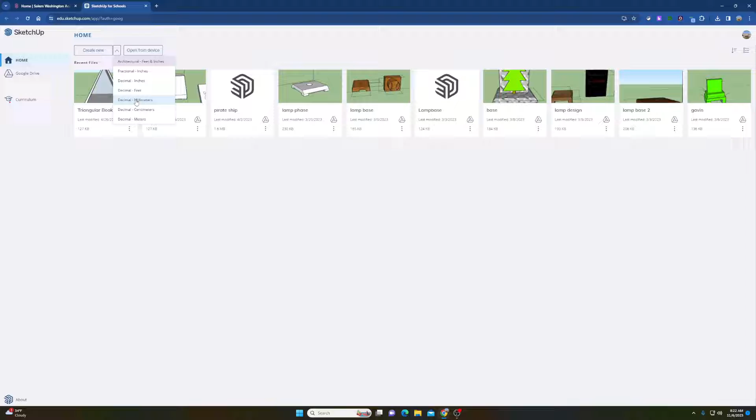You want it to be in millimeters decimal. So go to the drop down arrow next to Create New, and create a new decimal millimeters screen. Now your measurements will be in millimeters, since we are doing our 3D printed magnet. As a max, the 3D printed magnet can be 75 millimeters in diameter and about 10 millimeters in thickness, extrusion.

So we have the rectangle tool here. I don't want to show you the rectangle tool because that is in this tool menu. What is confusing a lot of people is where you find everything else. On your Chromebooks it looks like that. On the computer it looks like this, but I'm going to make it look like your Chromebook so it's the same layout. Let's say I'm going to choose a circle.

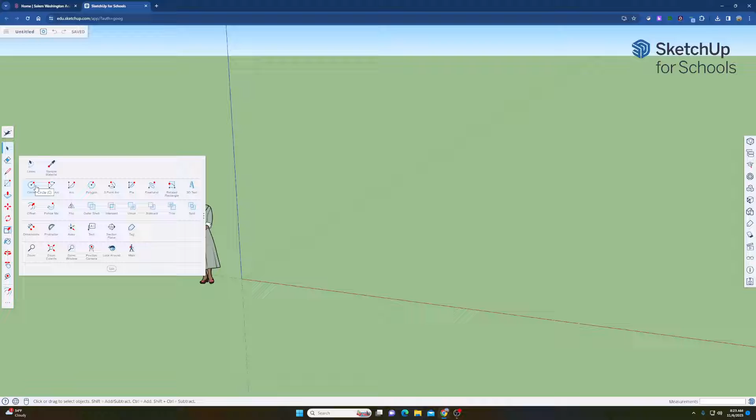Circles first tell you the sides that it's made of, 24. That's how many little lines there are in a circle. With the size that we're doing, 24 is just fine. It's also asking me for a radius. If you remember in math, radius is half the diameter of a circle. The radius is the center to the outside edge of a circle.

So if I wanted a 60 millimeter diameter, I'll do a 30 millimeter, okay? Notice I didn't click anywhere or touch anything, I just typed on the keyboard while I had the tool open. Before I click and the tool's still open, I can let go of the mouse, type in 30mm, hit enter, and it's now there.

Now it looks small compared to the person, but that's why the person is there, to give you scale and perspective. If it looks like a gigantic pool, then you know that it's too big for the 3D printer.

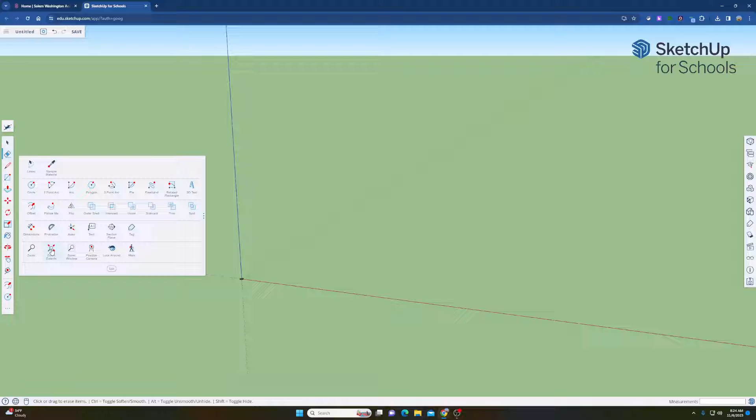So first thing I'm going to do is erase the person. Second, under the menu down here, I'm going to click on this magnifying glass with the 3 arrows, that's zoom extents, and I'm now zoomed in. Now I'm going to roll back a little bit so you can see it, using my mouse wheel to roll in and out.

I am going to use the push-pull tool. Push-pull, and now I had said about 10 millimeters, so if I make this bottom let's say 4 millimeters, I can let go of the mouse or just go with the mouse. It's clicking at each millimeter interval, so I can just bring it up to 4 millimeters. I don't have to go to the max, I can do a little less than the max.

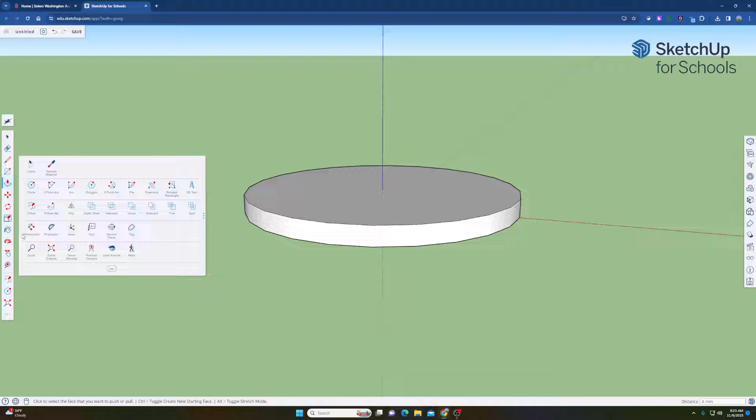Now let's say I want to add some 3D text to it. Under the dots, up under all the different shapes, you have the 3D text tool. If you notice, it starts out with a height of minus 305 millimeters and the text extrusion at minus 152 millimeters. We're going to want to change these values.

So the height is the height of the actual letters. If my circle is 60 millimeters, let's see how big it will be with a height of 30 millimeters. Then the extrusion, I only want it to come out 4 millimeters, right? So my whole thing will be 8 millimeters thick. Let's say I'm going to write Tech 7.

Depending on the font you choose, sometimes the fonts will have some different options to them. So let's say if I select it, I can choose a bold font. Oh, I have to choose it before I type it, let's just verify that. So is it bold? Tech 7. And let's say I'm going to write it in a different font.

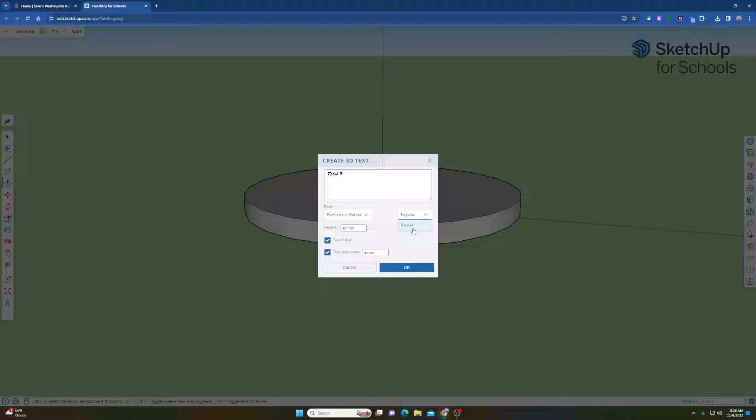Okay, so see how this one you can only do regular, can't do it in bold. So let's say Tech 7. Okay, so they're way too big.

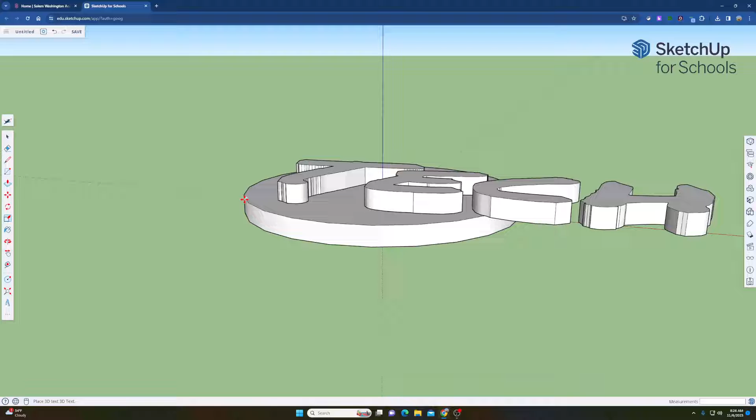One of the really important things you can also do is make sure that you're selecting the surface to put this on. You don't want to put it on the side, and you don't want to put it down where it's going to be at the same height. You want to put it on top. So I'm going to click on one of the points on the circle, and if you notice, it has this blue bar around it.

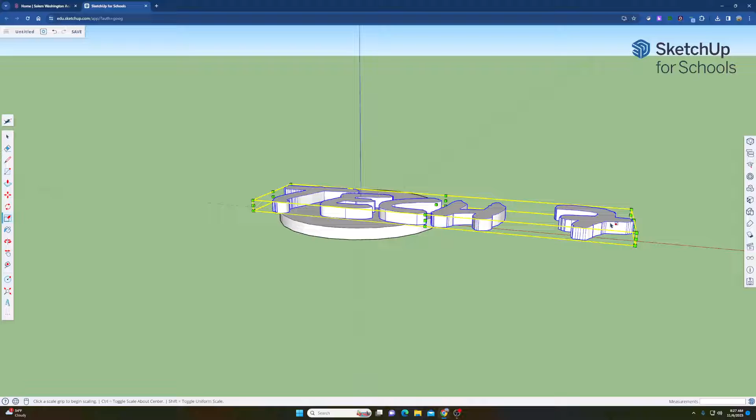The blue bar allows you to move it around on the red axis. Then the scale tool is this one with the handles - if I click on it with the scale tool, I now have the handles. I'm going to grab a handle from the top, because I really want it to get smaller. So it did get smaller, so I'll have to go up a little bit to make it that many millimeters.

Okay, now I want to move it - readjust it, not get rid of it. So I'm going to click on the 4 arrows. I like to click somewhere near the bottom so that I'm keeping it on top of the surface, on face. See that? How it said on face? That's what you want it to say, on face, meaning it's on the top of that circle.

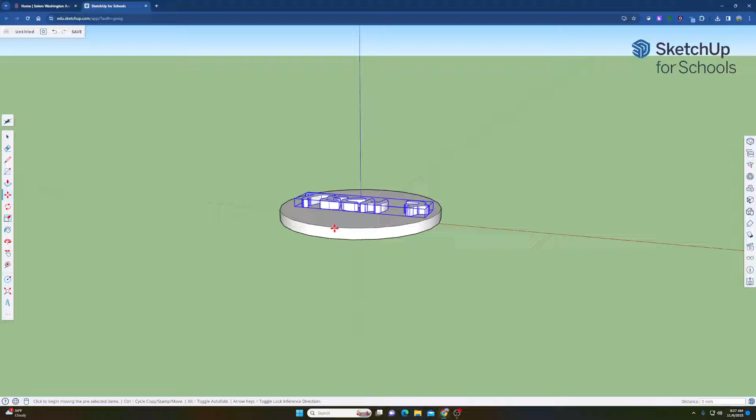Okay, let's say we want to change some colors here. Under the paint bucket tool, which is right there, it opens up a menu with some common colors, but if you click on search, you have all types of colors. I could even just go into colors. Let's say I want the lettering to be yellow, so I click on that, and the lettering is yellow.

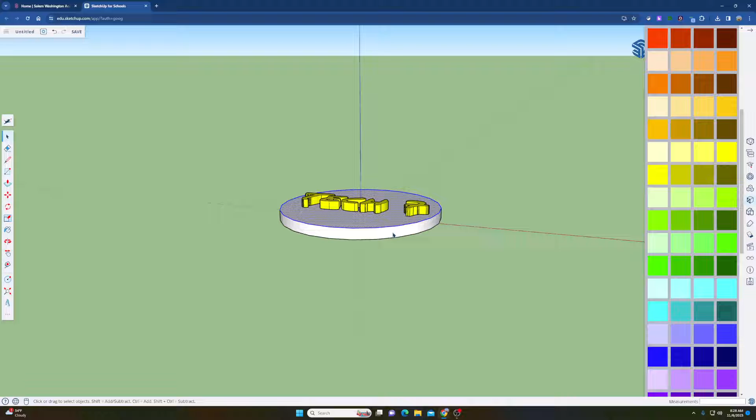Another handy tip is that if you triple click on something, you select all of it. So click, click, click - I can do all the surfaces at once.

Okay, so that's a quick little tutorial on doing a circle with 3D print. If you want to try out different shapes, try out different shapes.

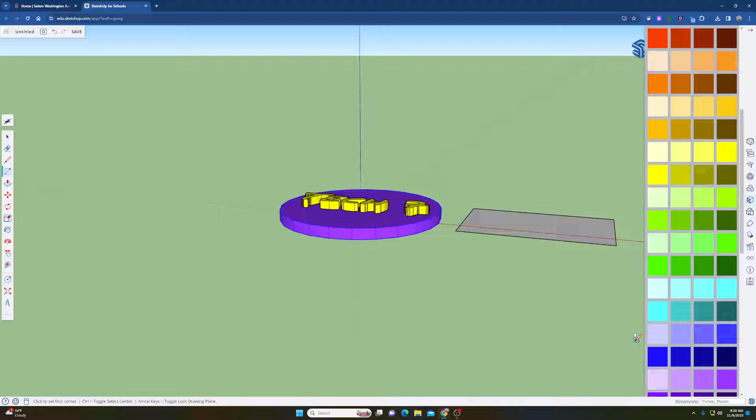Remember that you're in millimeters, so if I wanted to make something to be the biggest it can be, I just let go and type in, say, 75 millimeters, comma, space, let's say 35 millimeters. So it should be like a rectangle. Okay, and if I back out, you'll see that it is actually a rectangle.

Okay, if I wanted to lift this up first, you can go up, let's say 5 millimeters. And let's say I don't want it to be pointy in the corners, so I'm going to try a different shape, and I'm going to kind of push it away.

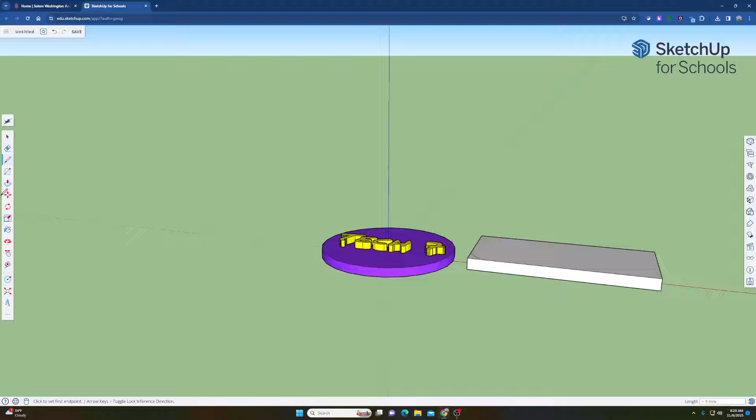First, you have the line tool to make a straight line. So if I made a straight line from, let's say, here to here on the edge, I now have a new surface there. And if I use the push-pull tool, I can just select that surface - you see how it's just hatched on that little spot.

Over here, of course, is the whole thing. Over here is just that little triangle. And when I want something hollow, I have to make it even with the edge, and it will be gone - it'll disappear. Okay, you can do the same thing with arcs and the arc tool.

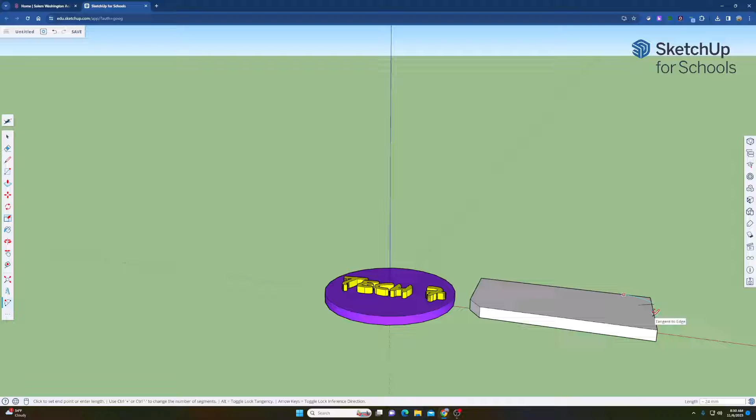So if you go into 2-point or 3-point arcs - let's see, I like the 2-point. You click somewhere here, you click somewhere there, and then you can move it until it's tangent or however you want it, and then pull this down to be even with this bottom edge, which can be on the front as well. So now it's either an arc here or a straight line there.

I'm just doing random shapes that people have done in the past. Also keep in mind you can't have a lot of letters - if the letters are too small, the 3D printer will not print it.

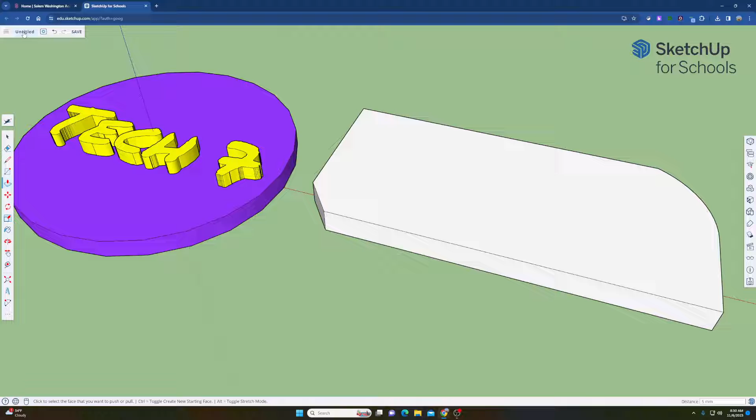So I'm also going to save here - we're going to save to my drive. I have a folder already set up for SketchUp, and I'm going to save it - so here we are, and here's my drive, and then I have my SketchUp folder, and then I'm going to name it my screencast video magnet, right, because it was the locker magnet.

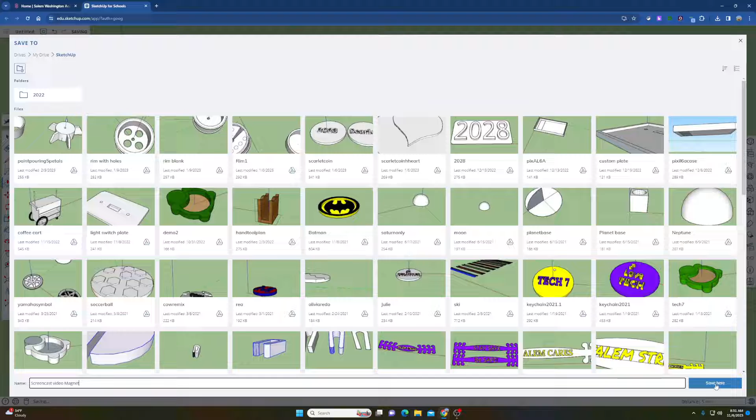Okay, and save here. When you're ready to save this as an STL file - so now it's saved as a SketchUp file. To save it as an STL file, under these 3 lines, we're going to go to download, and under download we're going to go to STL. STL is the type of file that will be named the same exact thing, and right now it's going to be under my download, so it'll be the most current in your Chrome drive, but you're going to add this file and the SketchUp file to the assignment to turn it in.